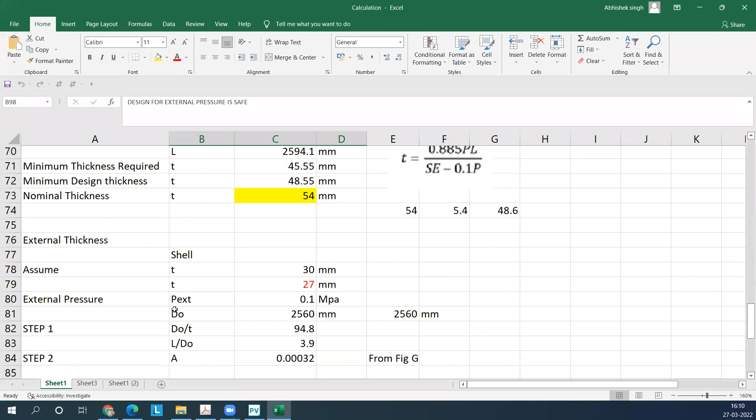You guys can see my screen? Yes, sir. So we did some calculation for elliptical, torispherical, and also did external pressure thickness calculation. Okay.

So what was the thickness which you got for hemispherical head? Okay, so Ninad is saying he got 32. Anyone else? So Ninad did hemispherical and conical both. So both were 32, Ninad?

Okay, let us first focus on hemispherical head thickness calculation. So do you guys want me to do it? Shall we do it together or you can do it? Together, sir. Together. Okay. Who was it? Sir, Mohammad Asif. Okay, Asif. Okay. So you want us to do it together. Okay. Let us do it then.

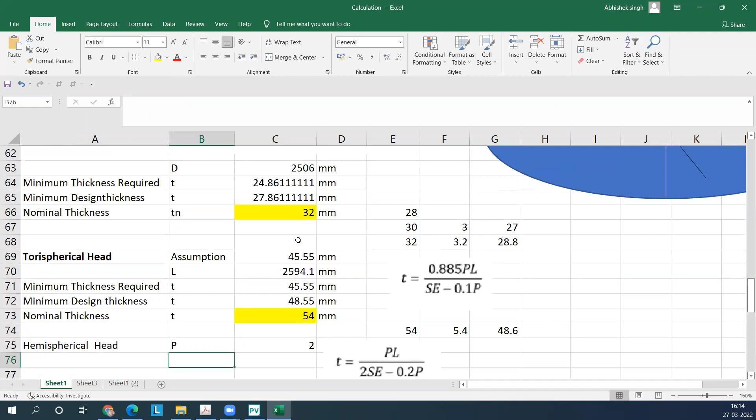So I've copied the formula for hemispherical. Okay, hope you guys can able to see it, right? Okay, so now let us find out the different terms. What was the pressure value? Pressure value what you took? 20 bars. 20 bar or 2 MPa, right? So let us take 2 MPa.

Then what is L? Now this is tricky. What is L? What is the L value we have to assume? Yes, go ahead. Keshav, or who have already calculated, you can tell me what is the L value which you took.

inside diameter, plus twice the thickness, but you don't have the thickness till now. So whether you will assume, okay, so Ninad is saying you will take 2506 plus twice T. We'll just let us write down the same thing, 2506. Later on we'll try to formulate 2 times T. This is what Ninad is saying. What about others?

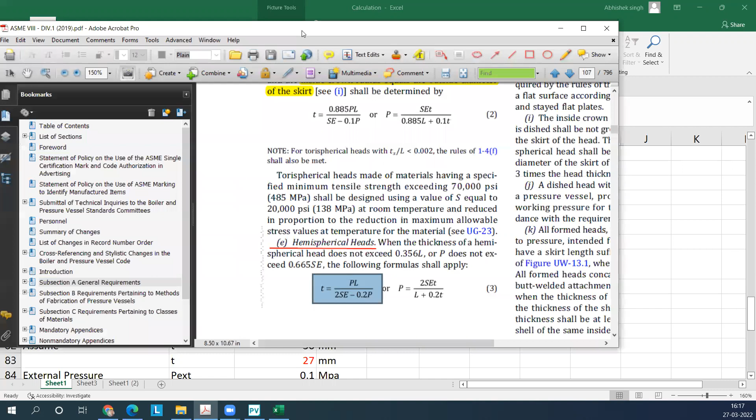Now let us see how L is defined in the code, and then again I'd like to discuss. I want all of you to participate, just see and give your opinion. I'd like to hear from the one who has not spoken till now. This is L. Okay, now I want Aman.

Just read and tell me what you understood with this statement and how you will calculate the L value. This is the definition given by code, right? All of you can actually see it. I'll come to you one by one.

Aman, anything you want to say? Okay, Ankur, Dakshad, Harshad, Shashank, Tanishk - sir, it is given that L is the crown radius, and we can...

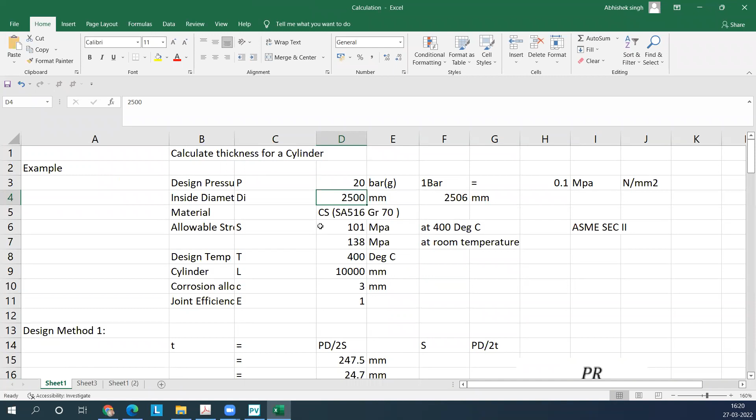So what will be my radius? Just half of that, so 1250, right? So now we know that - shall I take 1250 or... this is my radius, I'll just divide by 2. Is that okay?

Yes sir, yes sir. I don't need to find the corroded radius - see, if this is an ASME formula, that means L is corroded radius, isn't it? Because we have learned that all the formulas give only corroded dimensions.

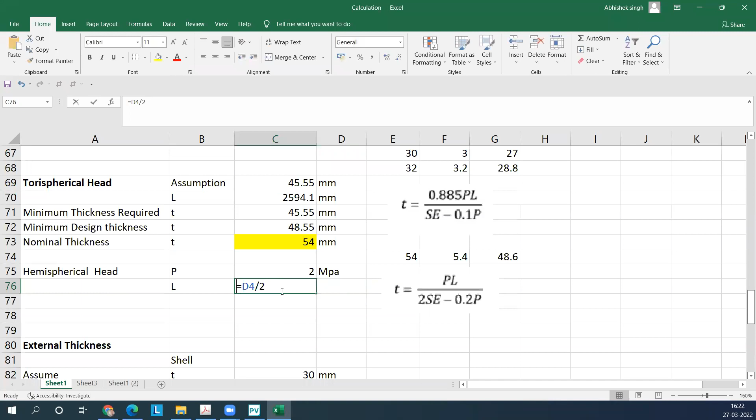So if it is corroded, then what will be the value? Plus 3 - 1253, sorry, 1253. So what I'll have to do, I'll have to just add the corrosion loss. Actually I'm not adding corrosion loss, I'm actually subtracting the corrosion loss - by adding, I'm removing the corrosion loss which was provided.

This is my inside crown radius. Any problem in that? Any confusion, guys? No sir, everybody is in line. Ninad, Ahmed, Idris - yes sir, fine, pretty clear. I'm just finding the radius, okay, and which is corroded, so first of all I'll divide the normal radius, so 1250, and then find the corroded dimension by adding the corrosion allowance.

See guys, by this internship you may be learning only 5% of the design philosophies, so the intention should be like if I'm giving you a value of 100, you should try to capture all 100, then only you'll be at 5%. If you are capturing only 10%, thinking that okay, this is beyond the syllabus, I'm doing something great which others are not doing, that is not true. People are doing a lot of things, so don't think that people are not reading or not participating in this type.

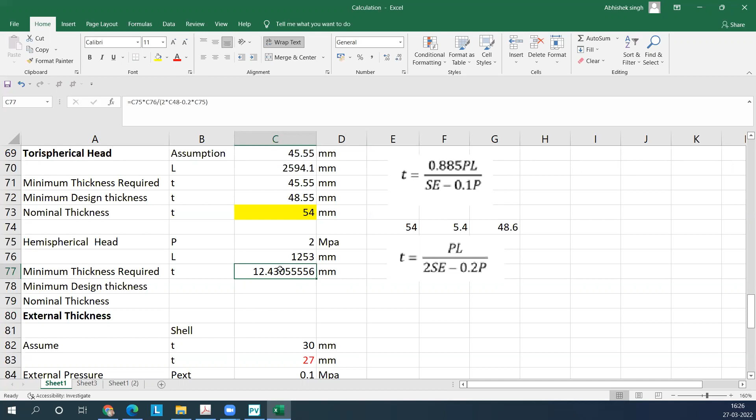So what did we get? What is the thickness we got? 12.43. Right? So now what was the thickness we got for a cylindrical shell? See, this was the thickness for longitudinal stresses, which is half of the circumferential stress. So now you see this is matching with the hemispherical thickness, and whatever we got is half of the circumferential stress. So you know that if you are designing a hemispherical head, your thickness will be roughly half of the thickness of the cylindrical shell.

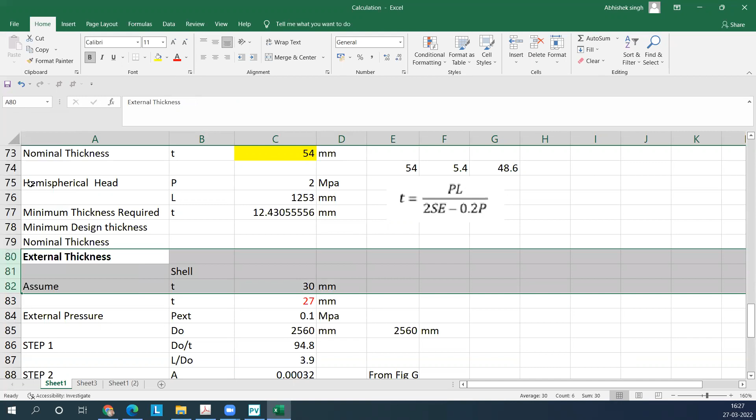Making sense? Hope you are able to digest whatever I just said. Hemispherical head will have the thickness which is half of the cylindrical shell. While you can see the other heads, torispherical we got 45, for elliptical we got 24.8.

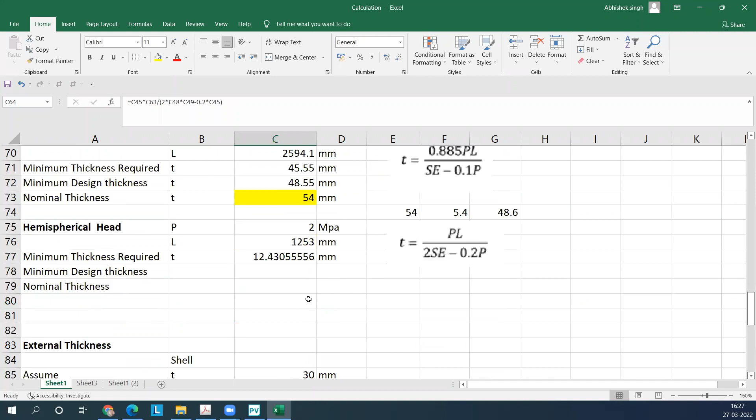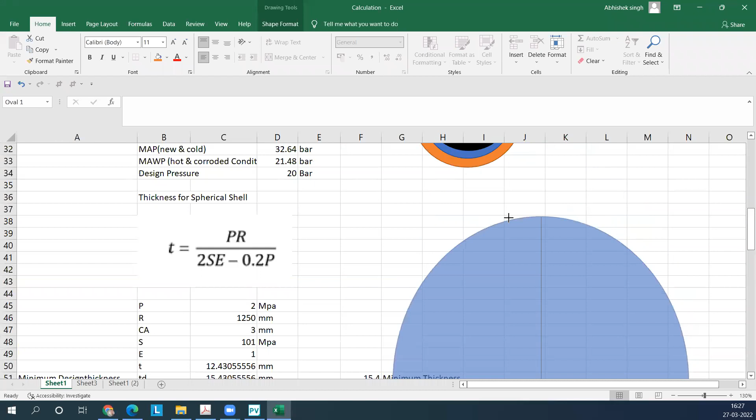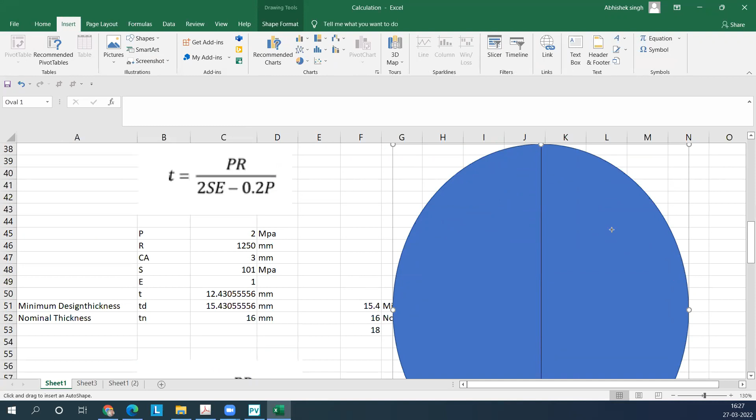So now if I ask you one question, this is the shape which is a kind of dish end. You just consider half of it. So if I increase the depth of it, whether my thickness will increase or decrease. Or let us ask in a different manner. Let us make it as a kind of shape so that it's not confusing for you. Now you can visualize it as a shell in addition.

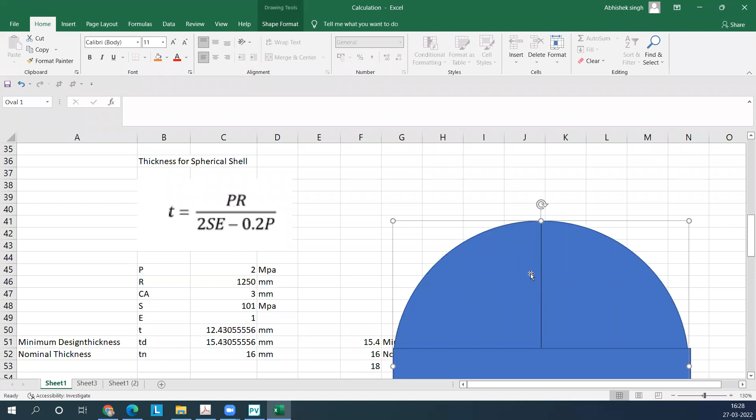So if this is the shape and if I'm making it flatter, which one will have more thickness, this one or the flatter one? What do you think? If it becomes flatter, meaning the radius is becoming more and more, will the thickness increase or reduce? It will increase, sir. Yeah, so that is what is happening in this case.

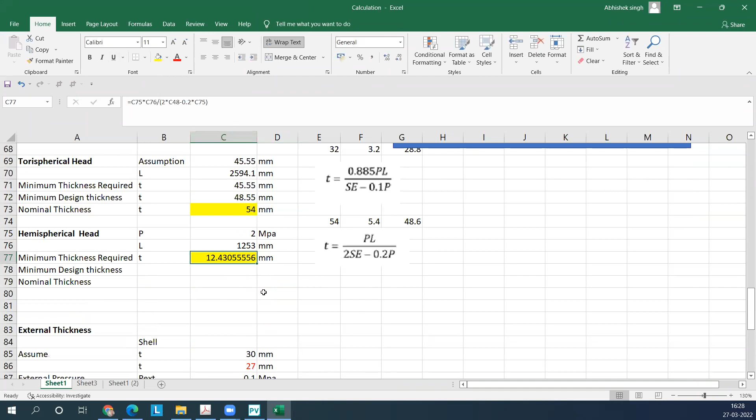My hemisphere is having the smallest radius, so the thickness we got is only 12.4. Next is 2 is to 1, for which we got 24.8, which is almost double the hemisphere. Once we move to torispherical, which is even flatter, we are getting 45.5 as the minimum thickness. So it is further increased.

Now if I select a completely flat head at the end, I can do that, right? Instead of selecting a dish end, I can just build a flat head, isn't it? So my thickness will be more compared to dish ends, or will it be less? Sir, more. It should be more, sir. Right, because if it is becoming flatter, it has to be more and more.

Okay, we are going to see that. We will be calculating thickness for this flat head also, but before calculating, we know that it will be coming much more, because now you see what is the radius of this flat head? It will be infinity.

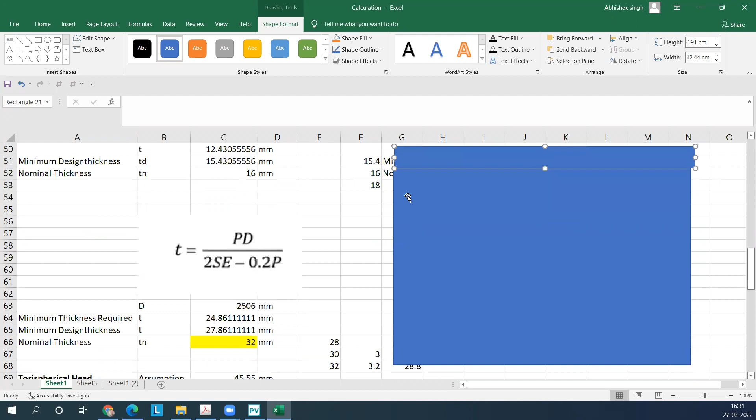But we'll rarely see a flat head welded with the end, because in that case you will have very high thickness. If I want to use a flat head, I'll like to strengthen it by welding lots of stiffeners. We'll come back to that, I don't want to complicate it for you. So up till that it's pretty clear, hemispherical head calculation. Any doubt to anyone?

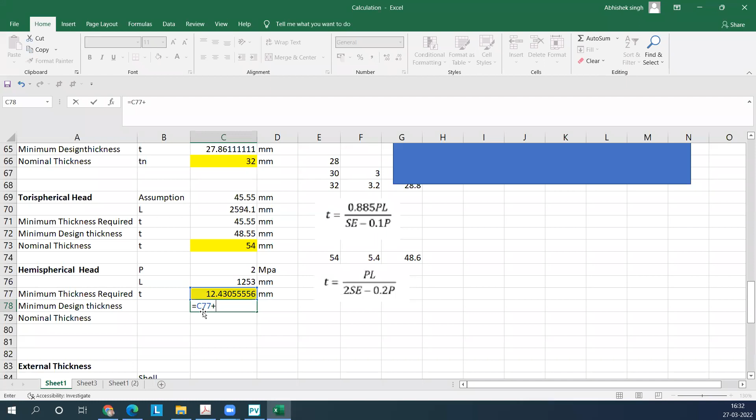Now I can definitely calculate the minimum design thickness. For minimum design thickness, what I'll have to do is take this thickness plus corrosion allowance, because I need a thickness where that margin is available for corrosion.

If this is my minimum design thickness, I need to take a nominal thickness which is higher, because if it is achieved by forming, there can be thinning. So I'll take 16 mm. Can I take 16 mm?

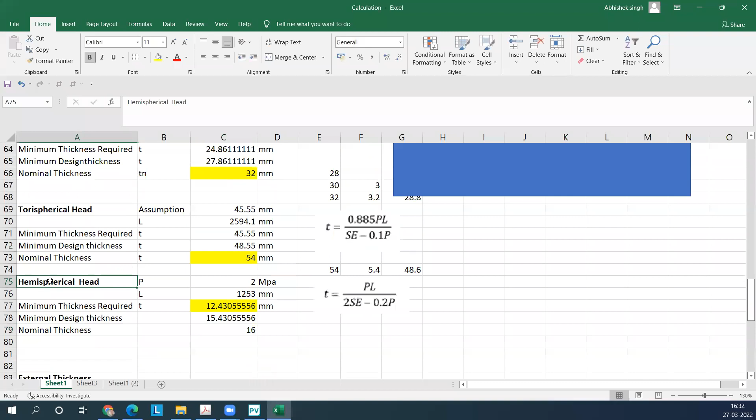Guys, can I take 16 mm as nominal thickness? If I take 16 mm, see if this hemisphere is being made from petals. Normally hemispheres are always made from petals, because forming this hemisphere head is very difficult, it has a very smaller radius. So normally these are in form of petals. So actually you can use 16 mm because petals are fabricated by forming where the thinning will not happen.

So you can always take it, but try to mention minimum and nominal thickness both, so that the vendor can decide. If he is not sure that he can achieve the minimum thickness which you have given by forming, then he will take larger thickness. That will be his responsibility. Making sense, guys? Okay, now let us go to the next.

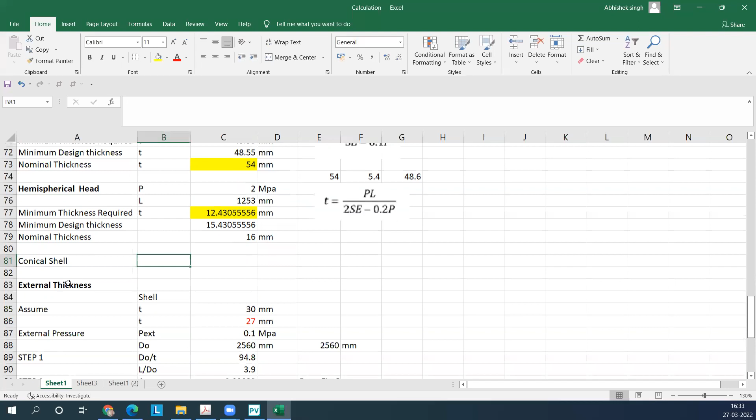What was the next shape? It is conical. If I have a conical shell or conical end, what I will do with that? If I have a conical shell, I'll go to the code and find the formula for that.

These are the conical head or conical section. I'll just copy this formula, paste it here. So once I have a conical shape, you need to know the angle, right? Because cone is always defined by angle.

So you can see that if I'm using this formula, there is a statement given here that half apex angle shall not be greater than 30 degrees. Now what is half apex angle, guys? Sir, half the angle of top of the cone.

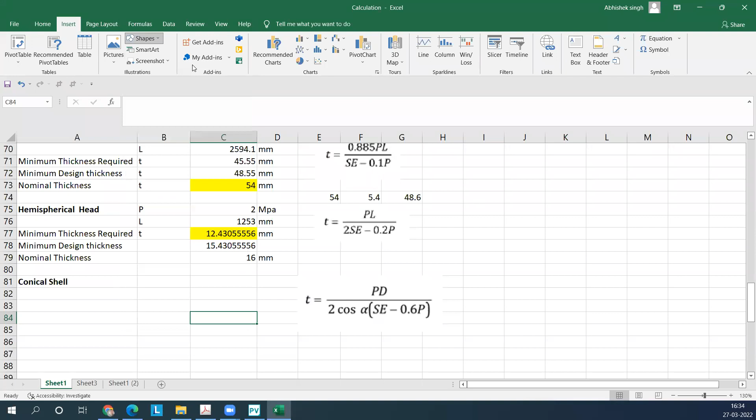Yes, you're right. So see, this is called the apex. If my apex is having a 60-degree angle, if it is an equilateral triangle, it will have a 60-degree angle, and half of it is 30 degrees. So 30 degrees is my half apex angle. So the code is saying that your conical head shall not have half apex angle greater than 30 degrees. Means the apex angle should not be more than 60 degrees.

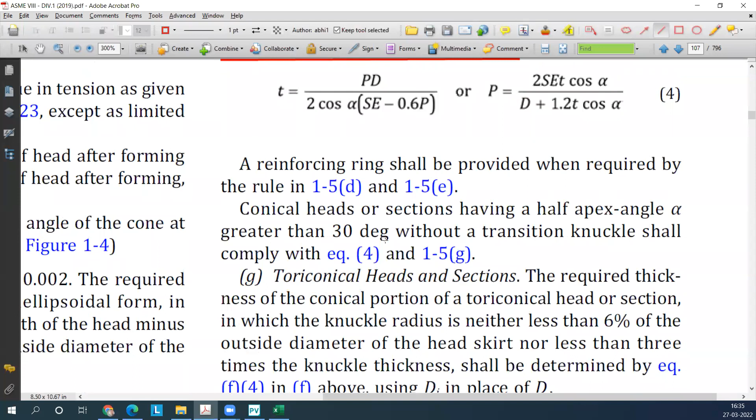Okay, if you want to follow this formula which is given here. If your half apex angle is greater than 30 degrees, you can use the next equation which is given in the appendix. So actually if you go to 1-5G, it talks about either providing a tori shape, which is tori-conical. Now I will come back to that, what is tori-conical. So unless you don't have any other option, you should not try to exceed the half apex angle.

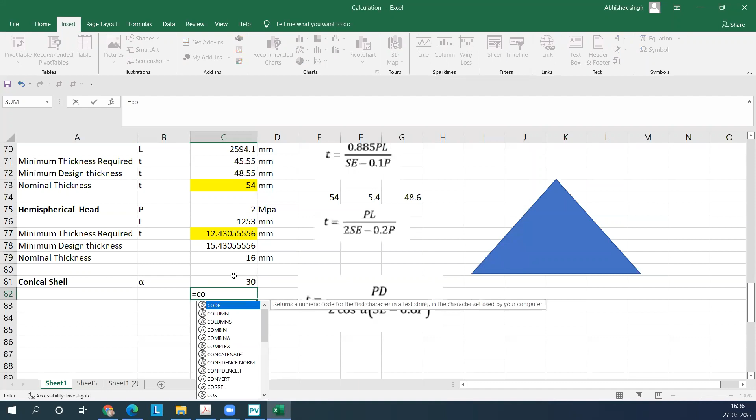30 degrees you should not try to exceed. So for our case, let us take 30 degrees as the alpha. So now what will be my cos alpha? What is cos 30 degrees? 0.866. Yeah, so now here I need that value in radian, right?

What are the other things? We have diameter. What is the diameter like? Now this conical shape, you can see will have lots of different diameters, isn't it? I'll just draw it completely so that you understand, there is a shell on this side. So that largest diameter of the cone is equal to the diameter of the cylinder.

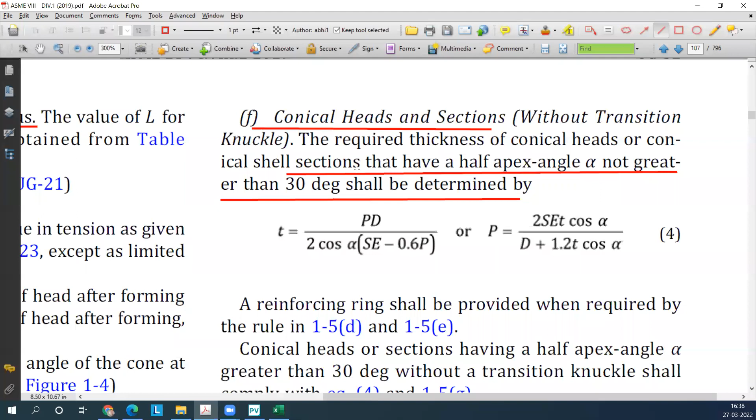So in that case, what diameter should I take, whether I should take a diameter in between or this maximum one? So code should be pretty clear. Let us see if code is defining that, because if it's code, then it should define completely. So now the required thickness of conical head or conical shell, we'll have to see the definition of D to see whether they have written anything. I'll go to diameter. Inside diameter of the head skirt. So I'm not talking about elliptical, I'll read the part for conical.

So what it tells is the inside diameter of a conical head at a point under consideration. So for the point where I want to calculate the thickness, I'll have to take the diameter at that point. So what should be my point for consideration, guys?

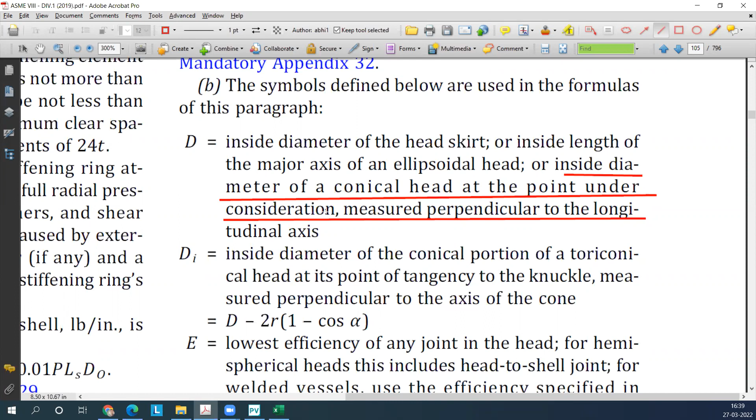The base of the cone. We have a cone with 30-degree angle. So now which point? Cone will have lots of different points, right, which will have different diameters. So at the base, at the base.

So Daksha is saying I'll take at the base. What about others? What do you think? Ahmad is also saying base. What about others? Aman is also saying base. So we must take at the base.

Why are you telling me to take at the base? If I take at, let us say this point, at the middle, my diameter will be less, isn't it? Yes, sir. And if my diameter is less, my thickness also is going to be less, because diameter and thickness are directly proportional. So why not take the minimum diameter so that your thickness will be lower?

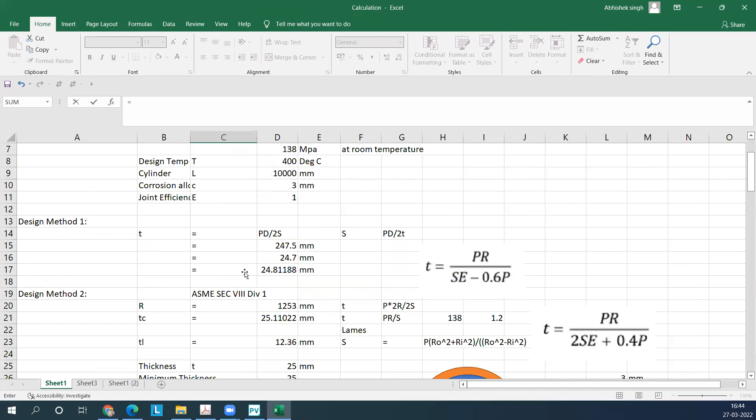Now let us find out. So now I know that if this is the cone, I'll have to take the diameter at the maximum point where the diameter is maximum. So what is the diameter at this point? Is it equal to the diameter for the shell, isn't it? Yes, no?

So if this is my inside diameter, can I take this or will I have to add thickness? Oh sorry, not thickness, the corrosion allowance. We should add it. Add it, right? Because always we have to add it. There is no confusion, right? Yes, sir, we have to find the corroded thickness.

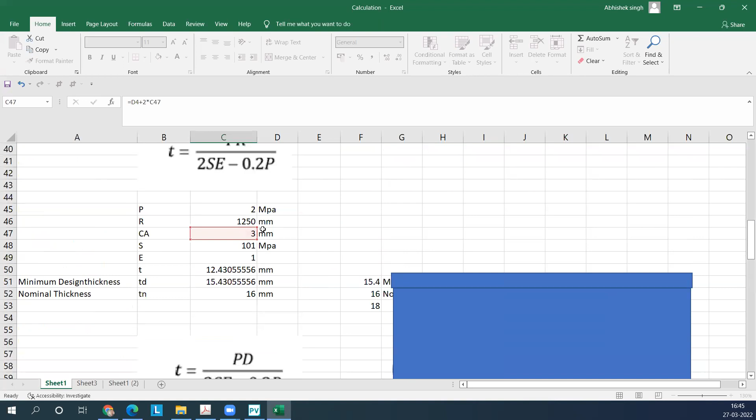So because it's diameter now, it will be twice the corrosion allowance. Earlier it was only radius, so only one corrosion allowance there. Okay, so I have found now the corroded diameter. Once I have that corroded diameter, I have the other things already available, and now I can calculate the thickness.

I'll just use the same three things. Now I'll multiply P into D, divided by 2 times cos alpha, which is this, into, again bracket, SE minus 0.6 times P.

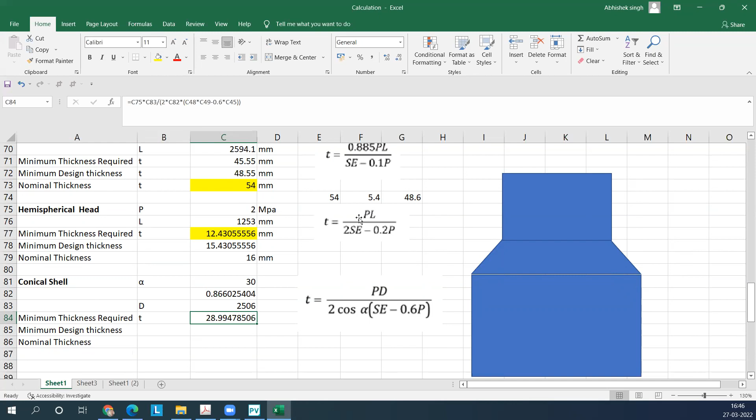Keshav calculated 28.7, but I'm getting 28.99. Let's check whether I am doing something wrong or you did. Check that: P into D divided by 2 cos alpha, multiplied by the bottommost part SE minus 0.6P. So 28.99 is correct.

So 28.99, that you got, is correct - 29. If you want to check by a short method, look at this formula closely. D by 2 is Radius, so PR, if you just ignore cos alpha, it's PR divided by SE minus 0.6P. This is exactly the formula for shell. So if the thickness we got for shell is divided by cos alpha, we get the thickness for cone. It's very easy.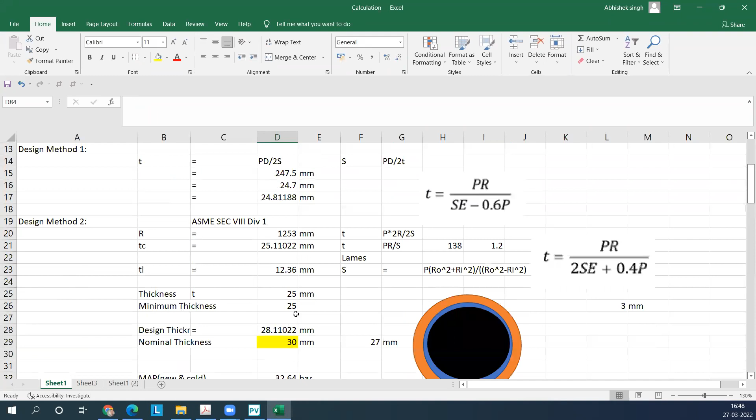So if I take the thickness of the shell - where we calculated this, I don't know whether this is the design thickness or nominal thickness, I think here we already added 3mm. Where is the shell thickness? That was 25.110, which we have calculated. Great, so I'll just divide that.

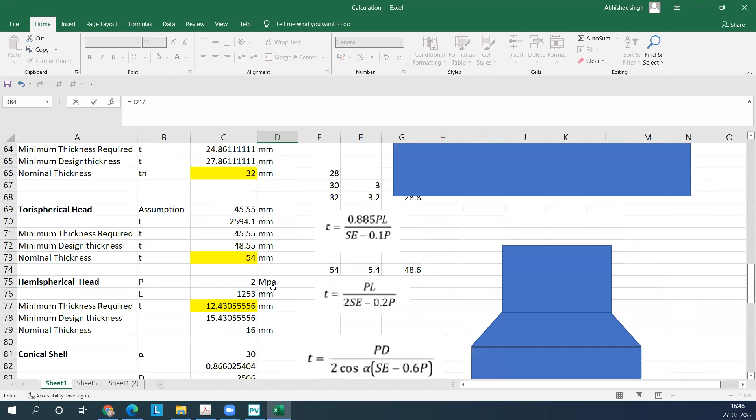For the conical shell, I'll use 25.11 divided by cos alpha, which is here. Bingo, I have the same value. So that means this formula is nothing but cylindrical shell thickness divided by cos alpha. Making sense, guys?

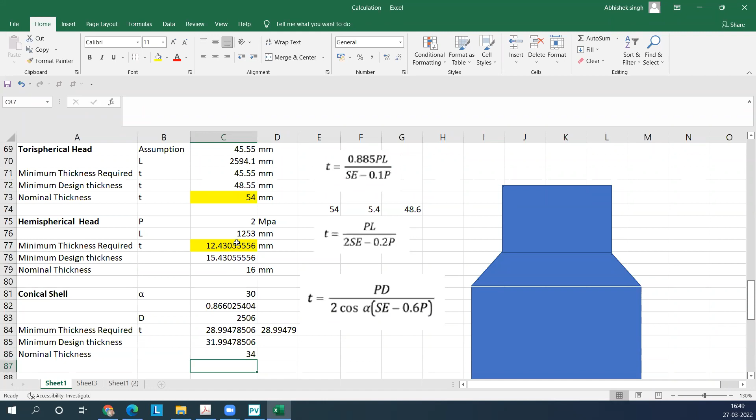Now I'll have to add corrosion allowance to get the design thickness. Then the nominal thickness - since it's a cone, we need some allowance for forming. It's very close to 32, so if you want to take 32 you can, but you have to mention the minimum thickness. If the fabricator is not sure, you can take 34mm and use that for plate formation. Making sense?

So we now have thickness for conical shell, for hemispherical. What is next? We also have a tori conical head. Now what is tori conical? Have you seen it? No? Tori conical head, okay, I'll show you a picture of it.

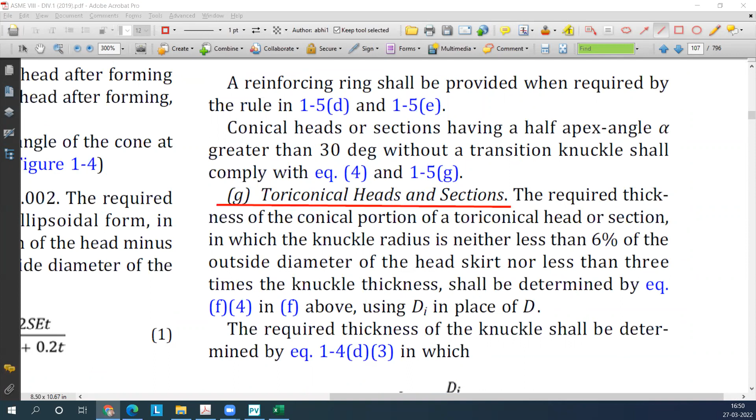Tori conical means it will be having - even in this code it is shown - you see the cone, it is having a radius at the end, so we can join it very smoothly. If I join a cone directly, it's a very sharp change suddenly from conical to cylindrical. Here it's changing with a radius, so it's a very smooth change. So if one or both ends of the cone has this radius, then it's called tori conical.

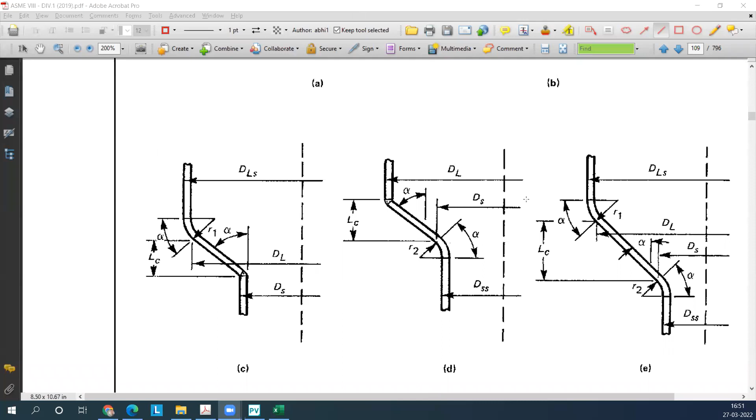Right guys, making sense? Yes. Great. So now I have to find out, if I have a tori conical head, how we will calculate the thickness.

So can you guys do it? Can I give this as homework? At least try to put some effort. It might not be as easy as the hemisphere, but you have to believe that you can do it, then you'll be able to. If you think we're reading rocket science and won't be able to get it, then you won't. You have to believe in yourself that you can read it and understand, and try to do it.

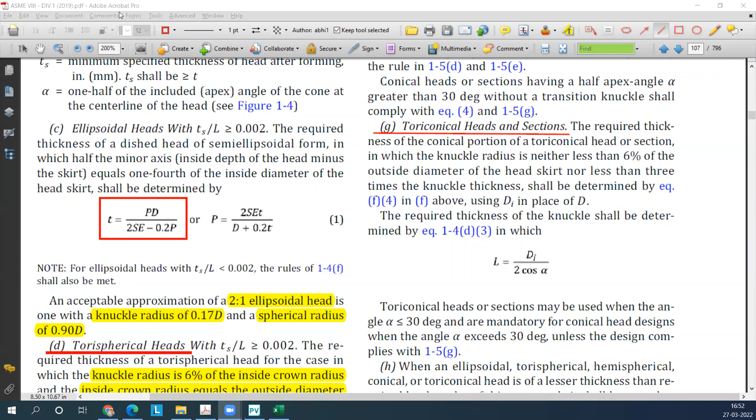You will be able to do it. Just go through whatever sections, try to come back. If one day you couldn't do it, try again another day with a fresh mind. You can share in the group if you've done something and couldn't understand, so others can reply too. Before the next class, I want it calculated and shared in the group. Hope you guys can do it. If it still doesn't happen, we'll discuss - don't worry about that, but try. That is what I want.

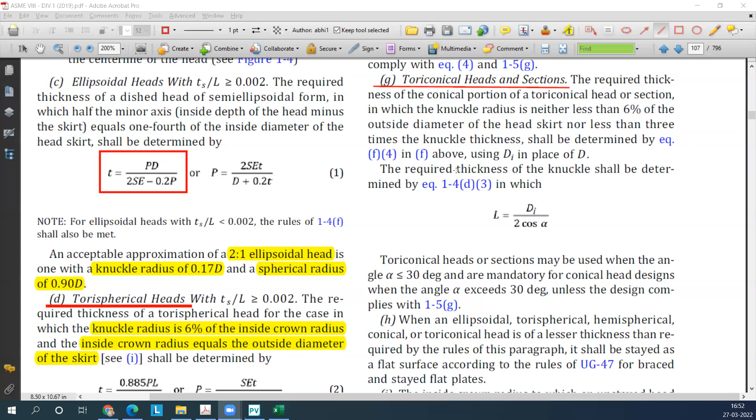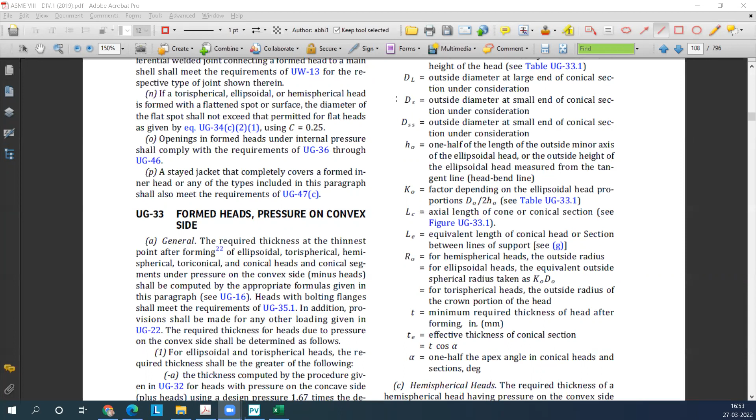So now we have calculated the thickness for a cylindrical shell, for an elliptical head, for a tori conical head - you have to do that one yourselves - conical head, hemispherical, everything. We have all the possible types of shapes. We know how to calculate the thickness due to internal pressure. For a cylinder, you also know how to calculate for external pressure, isn't it? Do you remember that, or forgot?

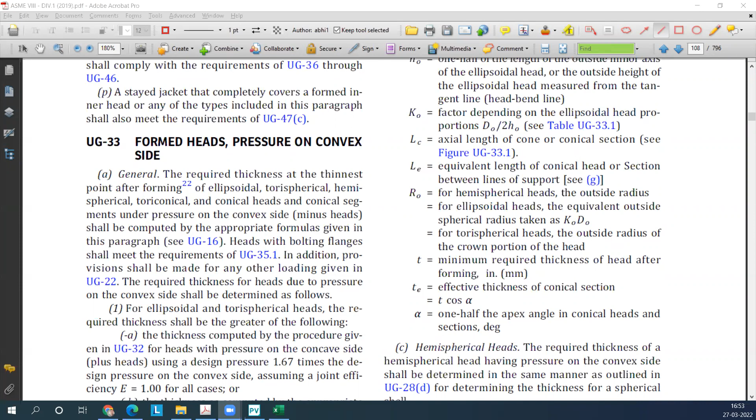So let us move to that external. Now, it's not writing as external pressure for formed head, but it is writing as convex side, concave and convex. Okay, so if you remember...

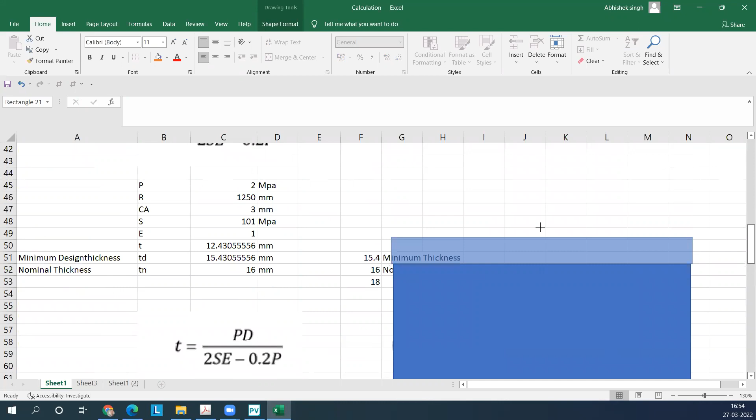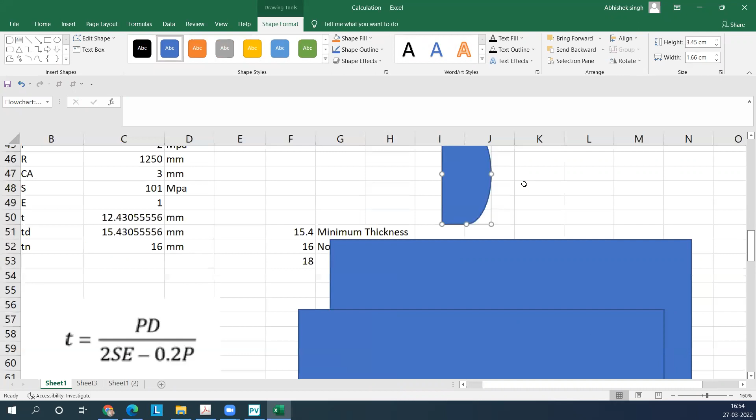Say if there is a dish end, I'll just insert this dish end. I think we have deleted it. So if this is my dish end, what will be this portion called from inside? Concave, right? The opposite side is convex, right? So no doubt about concave and convex.

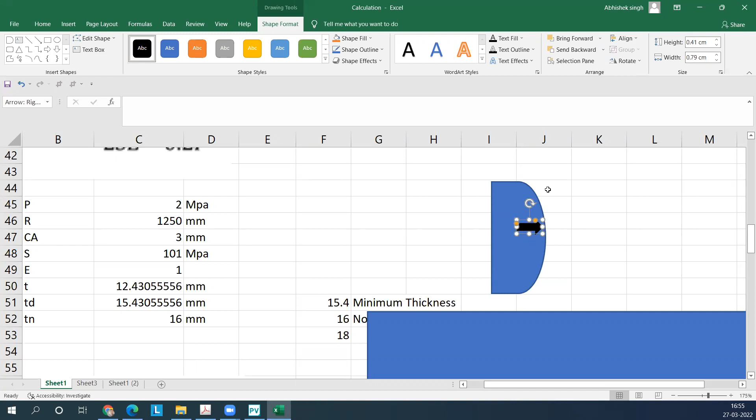Now why is it, when there was a cylinder, the code said very clearly internal and external pressure, but for dish end it's saying concave side and convex side. Why? The pressure for concave side, and calculation of thickness for convex side. Why do you think there are different words getting used for this? Why not just say calculation of formed head thickness for external pressure? Can we say that?

Guys, are you there? Don't know, sir.

Any idea? It's not rocket science. For external pressure, Ninad is saying yes. Acha, you are there, okay. Yeah please, anything which is coming. It's very simple guys, I'm again saying it's not rocket science that you are reading. It's very simple and logical. Everything can be answered with logic.

Sir, maybe for external pressure, as the pressure is calculated by force upon area, the outside area is not a flat one. So because of the shape, we are saying there will be some effect of the convex shape.

See, there will be an effect of internal and external pressure on the dish end. If the dish end is connected to a shell - okay, this is my dish end and this is a shell. I'll just make it completely so that you...

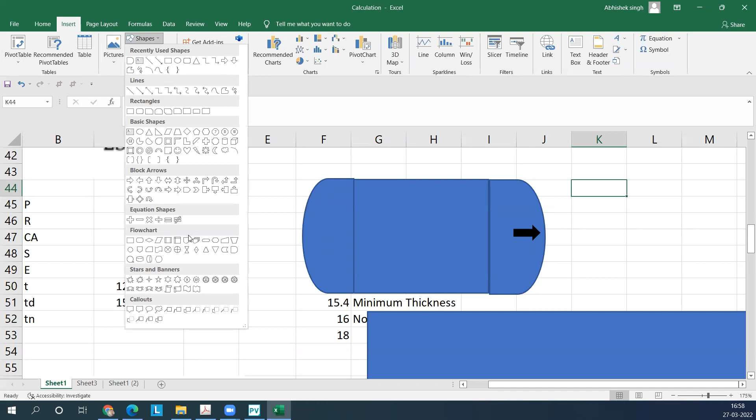So for that internal pressure, I need to design this dish end for concave side or convex side? You have to design, sir, for internal pressure, it should be from concave side. Concave side, right, if it is attached like that. Yes sir. If there is external pressure, in the same case, I need to design this dish end using which formula or which clause? UG33, which is for convex side.

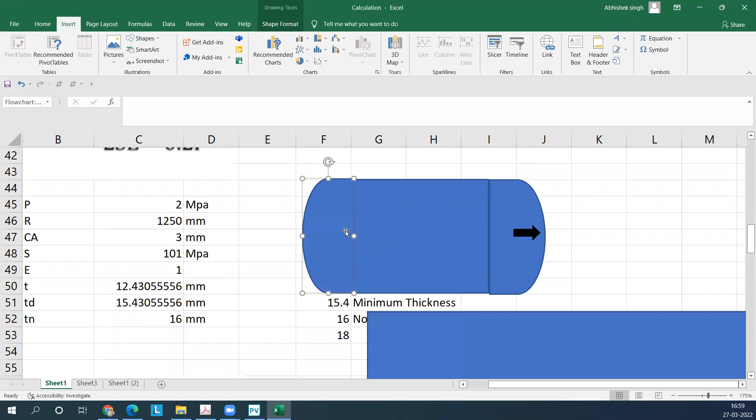Yes sir, am I making sense? Yes sir, yes sir, yes sir. So I'm just saying if there is internal pressure, I have to design this dish end for concave side by using the formula which we saw in UG32, which clearly says formed heads and sections pressure on concave side. So it does not matter finally whether it is internal or external, these are just words, right? Finally internal in this case. Now why is this word given?

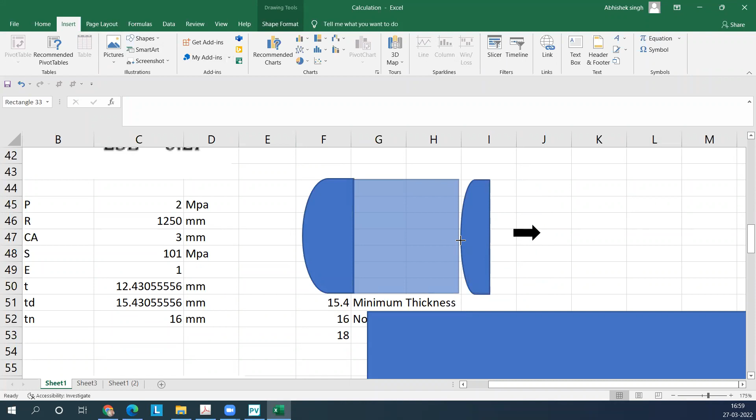No, because I can make a vessel like this. Let me just make it a different color so we can visualize it. Visualize it, right? Okay great, so anyway I'll just try to give it a different color.

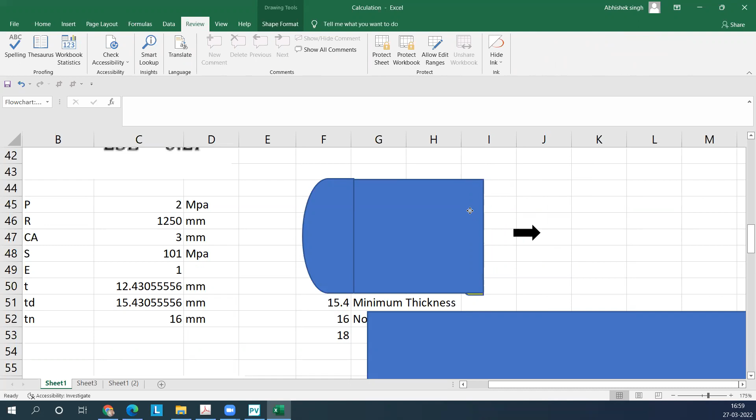Okay, I'll have to - if I'm attaching a dish end like this, I can do that, right? I'm free to do anything. The code is not preventing me from attaching the dish end, whether I can make a vessel like this or I can make a vessel like this.

So now in this case, when there is internal pressure acting on - sir, the convex area, convex side - convex side, right? So even though it is internal pressure, I need to design this dish end for clause number 33, which is for thickness calculation for convex side. Making sense now?

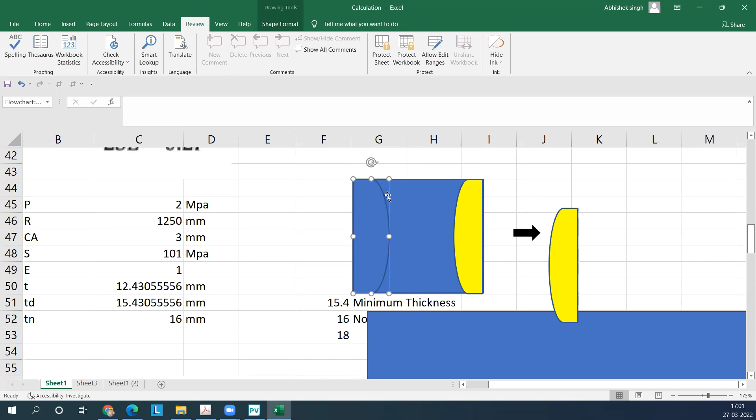Yes sir, yes yes sir. That is the reason instead of saying whether internal or external, because you can attach the dish end at any type - there may be pressure acting on the convex side. You might have made a vessel like this, so in that case the maximum pressure will be acting on the convex side, and you need to design for that. Okay, so now coming back to section 33 again, we'll go back in this section.

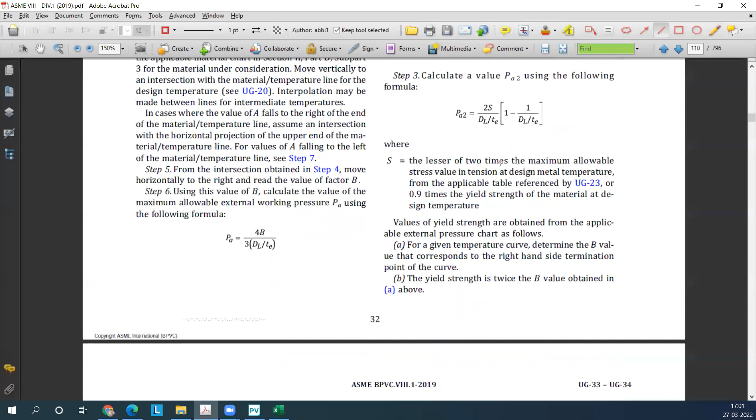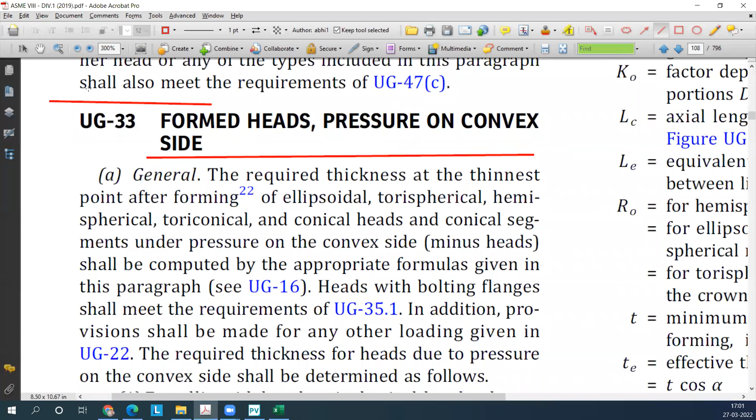Okay, now I want you guys to read a few lines and tell me what it means. Let me just pick out the lines which I want you to read. Just forget about this, we'll read that.

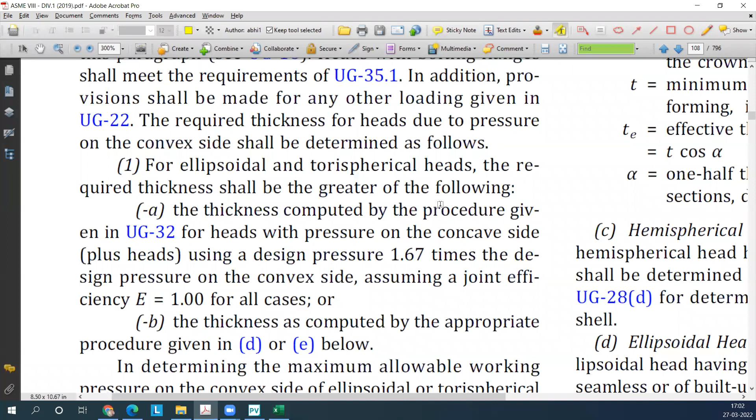So for ellipsoidal and torispherical head, the required thickness shall be the greater of the following. There are two different methodologies to calculate the thickness. So whatever thickness we got from A, let's say I got 10 mm, from B I got 12 mm, I'll have to select the greater of these two. So finally I'll select 12 mm. That is the meaning of this.

Now let us read the first method. Now I want you guys to just read this and tell me what you have understood.

It is readable, right? Yes, sir. Just try to read it and tell me what you have understood.

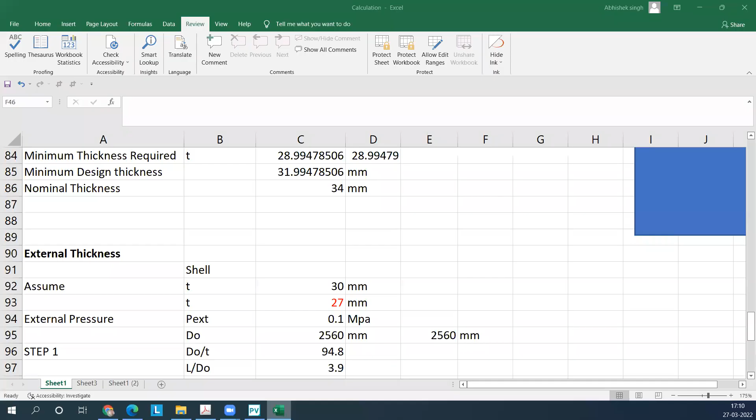So whatever pressure is there due to static head, that will be added in the pressure. I have not told you till now to calculate static head, so I wanted to keep it simple. But you have to remember that whenever there is liquid, like in this case which we calculated, if design pressure is given plus some liquid is filled, then you have to find the pressure due to that liquid. You have to calculate the static head.

And add that in the design pressure and then do the calculations. So you always have to use that, right? Any confusion in static head, guys? No confusion in static head, right? So whenever there is fluid, which will almost always be the case, 90% of the time there will be some liquid for some height.

You have to convert that into pressure using the static head formula, rho gh. Find out the little bit of pressure which is there because of that liquid. Why am I saying little bit? Because roughly a 10-meter water column will give you 1 bar pressure. Your vessel diameter will not be 10 meters, right? It will be only 3-4 meters.

Where static head becomes really critical is for columns. Columns are really tall, like 40 meters in height. So for 40-meter height, if it's completely filled with liquid, it will give almost 4 bar pressure, using the density of water. In that case, 4 bar means it will give a significant change. Otherwise it will be very marginal. But when you are a design engineer, you don't have to leave anything out. Whatever little bit is there, you have to use that static head, change your design pressure, and then calculate the thickness.

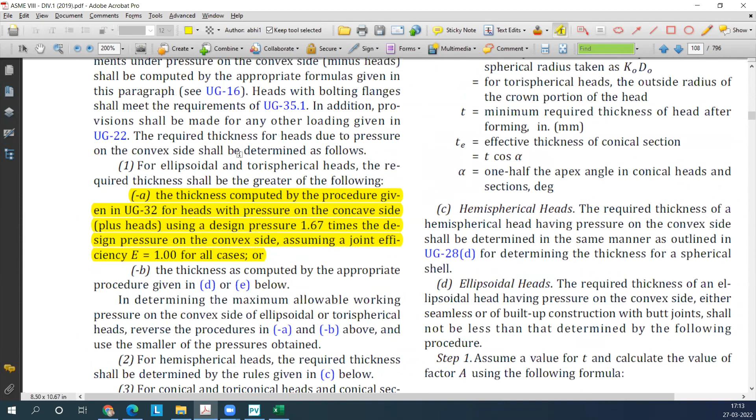Yes sir, yes sir. Great, good. Good discussion, guys. Okay, so now we have done with one of the methods, only one method we have seen. What is the second method by which we have to calculate the thickness?

That is the thickness as computed by the appropriate procedure given in D or E. So now part B is referring to some other clause, I'll have to go to D now. I can see that D or E means D is applicable for elliptical and E is applicable for torispherical, which is not currently part of my calculation. I want to calculate for elliptical, so I'll have to refer only to D. So what D is saying - once you are at the convex side, that's actually the external pressure calculation.

So you might remember the procedure we followed for shell, that there's a geometrical parameter which is very important for external pressure - that L by D, D by T ratio. Last time we calculated, used the geometrical chart to find A, and then with A we found B, and from B we found applicable pressure. So you might be expecting a similar geometrical chart for the ellipsoidal head too.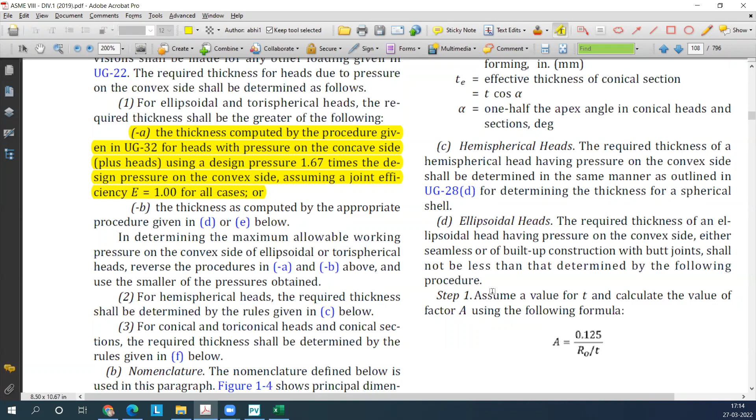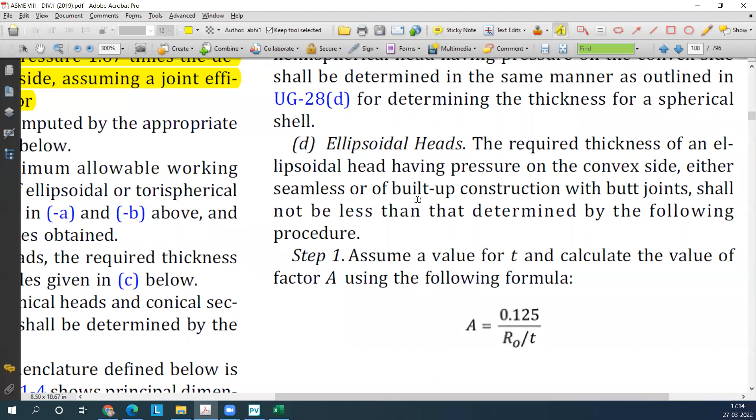It was not there in A, but now D is related to the geometrical part. So the required thickness of an elliptical head having pressure on the convex side, either seamless or built up construction with butt joint, shall not be less than calculated by the following procedure.

What is the procedure now? It is saying assume a value of T, like we did for shell. We have to assume a thickness. We can assume the same thickness which we have already got for internal pressure, because that is the minimum we have to give. So I can assume that thickness and calculate the value of factor A using this equation.

Nothing else is there, only RO, which is outside radius. Now what RO will you select for this? Let's see how it is defined. For hemispherical I'm not worried, so I'll read this one.

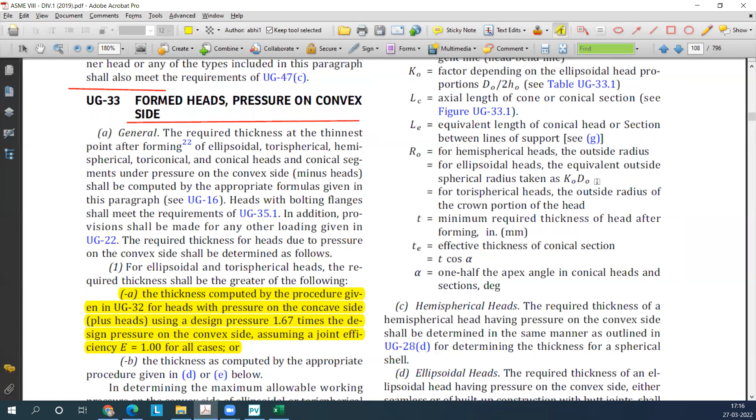For ellipsoidal head, the equivalent outside spherical radius is taken as K naught times D naught. K naught is defined as a factor depending upon the ratio - major divided by minor. In our case it's 2 is to 1 because we are selecting a 2 is to 1 elliptical head.

So if you use this table, you will get the value of K. Let me click on the table. This is the table which gives my K naught value, and this is the ratio D naught to 2h naught, major divided by minor. For my case it's 2 is to 1, so nothing but 2. For that, K naught value is 0.9.

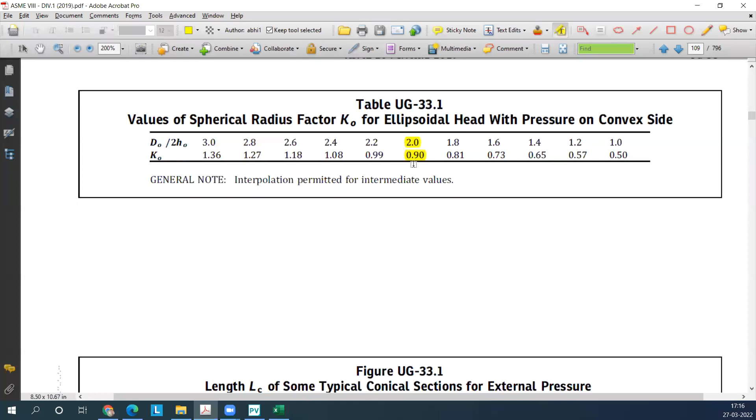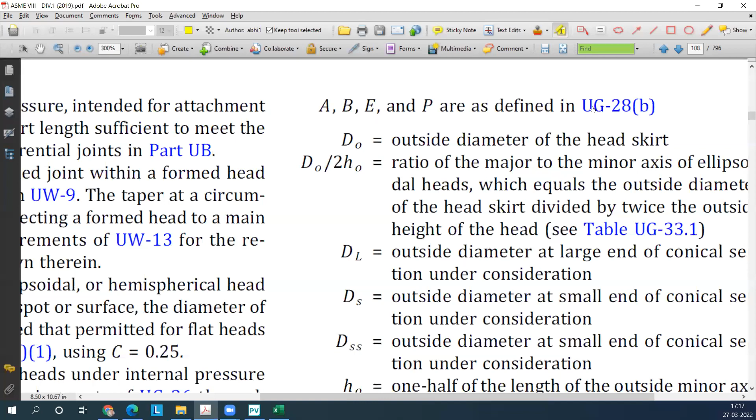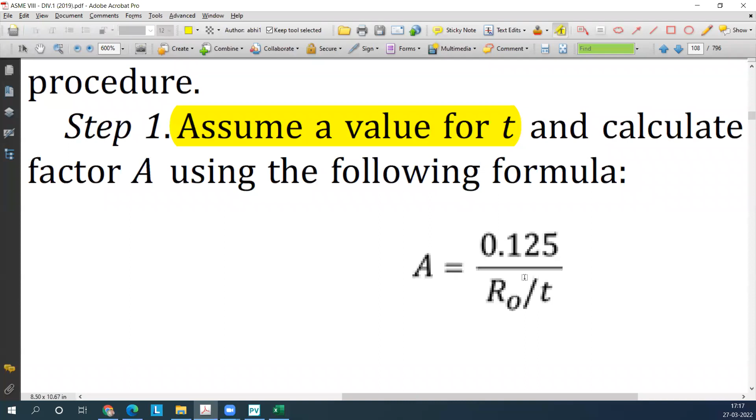Is it clear? Yes, sir. I'm going to give this also for homework, so make sure you understand everything.

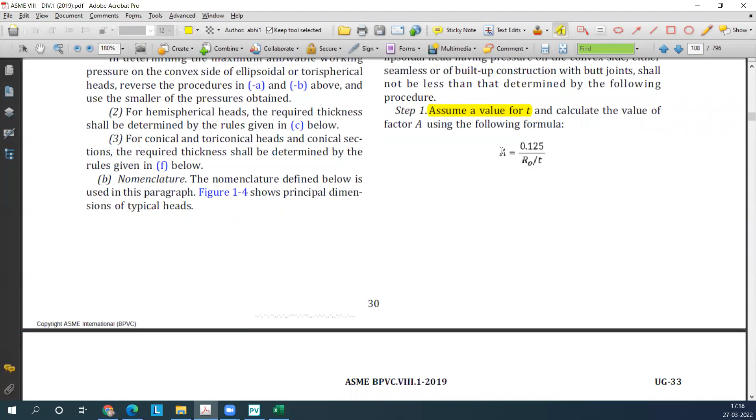So step one is to calculate factor A. What is next? Step 2 is using the value of A calculated in step 1, follow the same procedure given for spherical shell in UG-28(d), step 2 through 6. This is where young engineers like you will normally get lost, that again it's referring to something. Just be patient, it's nothing much. Like step 1 we already did, in step 2 it's saying to go to this clause and follow step 2.

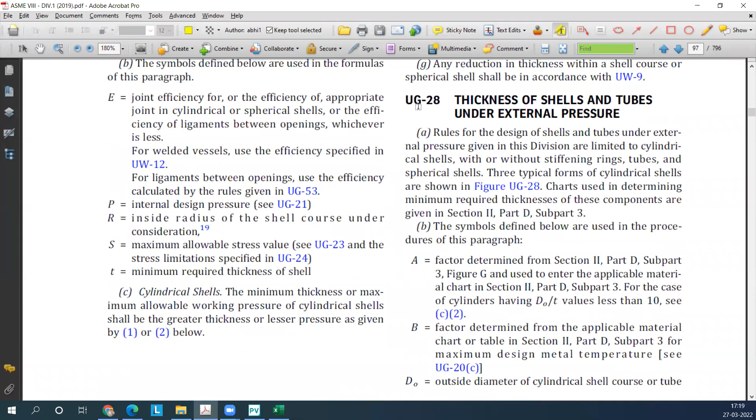So we'll just go to UG 28D and step 2. 28D means it has to be before. You can also click on that, but I want to show you, sometimes it becomes really confusing if you have to directly find 28 and what it was, B or D - sir, D. So 28D, I'll have to find out.

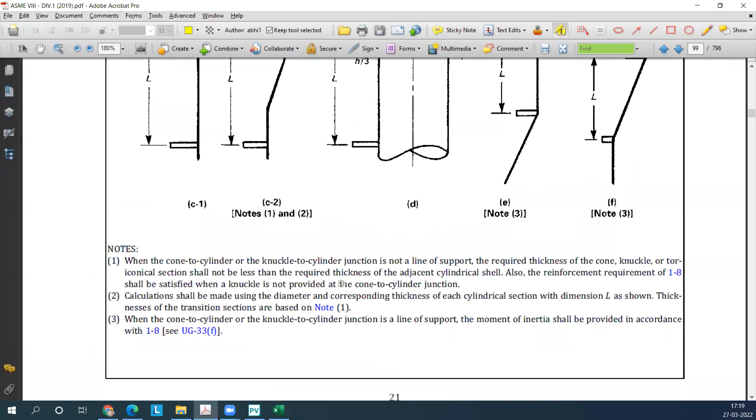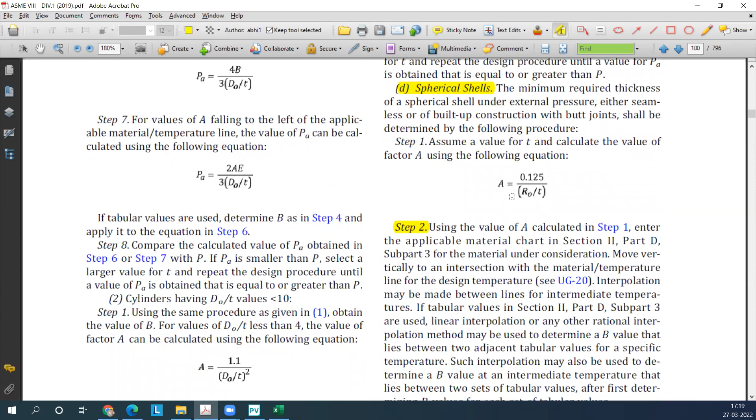28D is talking about spherical shell, so it was also mentioning for spherical shell. 28D step 2, because step 1 we have already performed. It's also giving you the same formula, but finally that RO value will be different for spherical and elliptical. So I have to start from step 2.

Once I have calculated the value A, now enter the applicable material chart. For our case it is CS what? Anyone can fill in the blanks? What is my applicable material? 516 or 716? So 516 grade 70 is the material. So which chart I need to follow?

Do you remember what chart we followed for cylindrical shell? 971 page number. Okay, you remember page number, but better remember chart number, no? CS2, sir. CS2, right, Ahmed? Exactly right. So we have to follow CS2.

So the next part I have to enter in the applicable material chart, which is for finding out the factor B. With the value we have already got for A, I can find the value of B. Once I have that value of B, I can calculate the allowable pressure. Making sense?

Yes, sir. Right? So by following this method, you will get to know whatever thickness I have assumed, whether it will be able to take that external pressure or not. So both of these calculations you have to perform to decide whether the thickness which I have selected is good for the convex side pressure. Making sense?

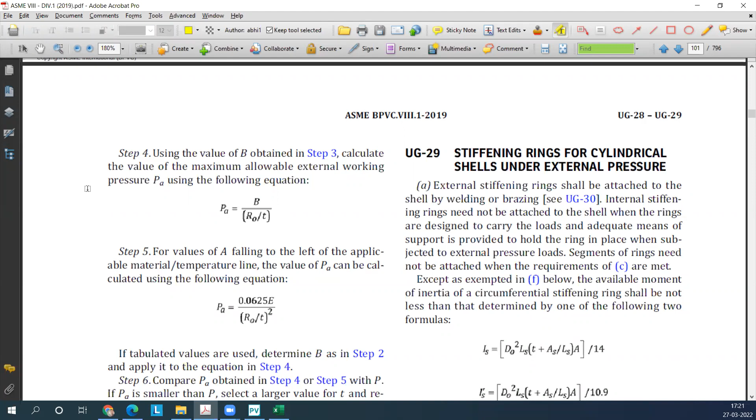I'll share this Excel sheet, don't worry. You have to build further in the same sheet and discuss in the group, so that everybody is on the same page. Just don't match the values, try to calculate. This is not an exam for this course. Just whatever you learn is the takeaway finally for whatever time you are spending with me. Try to increase the takeaway by participating more and doing homework, bringing the habit of reading the code. That is going to help you a lot.